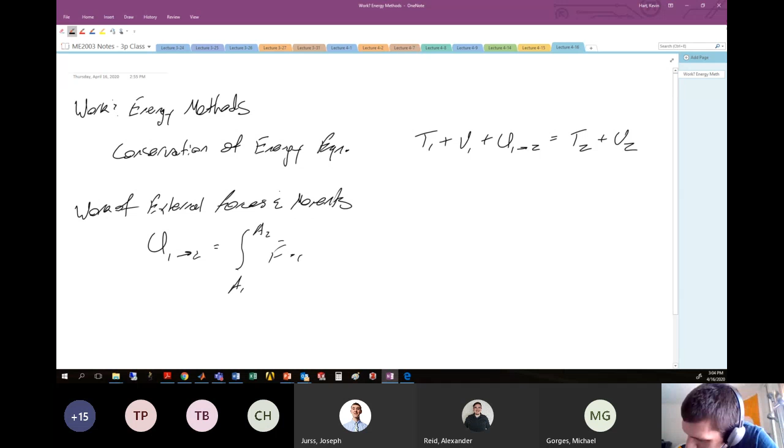So work of external forces and moments was this U1 to 2, which in big boy form was moving from position A1 to A2 of the forces dotted into the path that they move, plus work associated with moments as they act on our angular motion from angular position A1 to A2 of m dot d theta. With our example problem a little bit later, we'll see how this equation actually applies.

So that was the big boy form. We had a simplified form for when we wanted to look at 2-dimensional Cartesian dynamics, which is mostly like what we're doing in this particular class. So that was your U1 to 2, and this was sort of like the 3-dimensional form.

We also looked at kinetic energy, which was this T variable, and said that the kinetic energy of a rigid body was equal to 1/2 the mass of the rigid body multiplied by the velocity of the center of gravity of that rigid body squared, plus the kinetic energy associated with angular motion, which is 1/2 Ig - the mass moment of inertia of an object about its center of gravity - multiplied by the angular velocity of that object squared. So this was your dollar store version that we're going to use in this class. This is the 2D form.

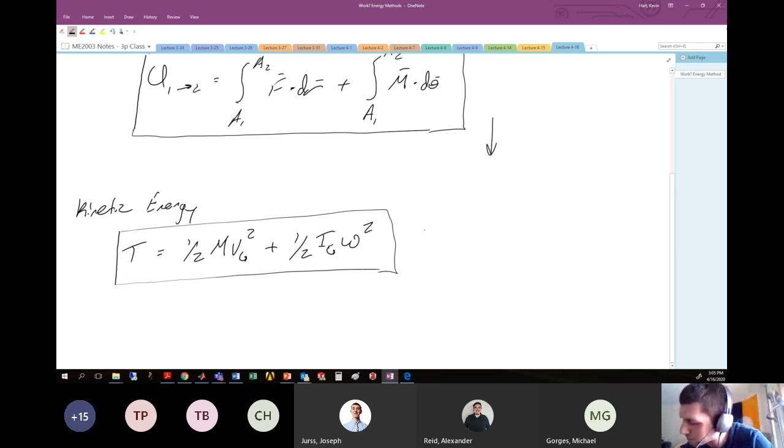And we had the more mathematical form, which if you're going to use an arbitrary coordinate system, or maybe do some more advanced mathematics later, this larger form uses the dot product: the velocity of the center of gravity of this object dotted with itself, plus one half the mass moment of this object—here this would be a tensor, not going to get into that too much—dotted with omega dotted with omega. So this is your big boy mathy version that we used in our derivation and whittled down into the 2D version.

So this is your 3D version. We're mostly going to stick with this equation here. But the point is that we had some kinetic energy associated with linear motion—so this is kinetic energy of linear motion—and this guy here is the kinetic energy of angular motion.

So that was your external forces and moments portion of the work and energy equation, and we also had the kinetic energy portion, which we've been whittling down over the last day and a half. Now we move on to what is the easiest component, and it should maybe only take us about 10 or so minutes to get through: the potential energy term. So this is the last term, and that is the potential energy term.

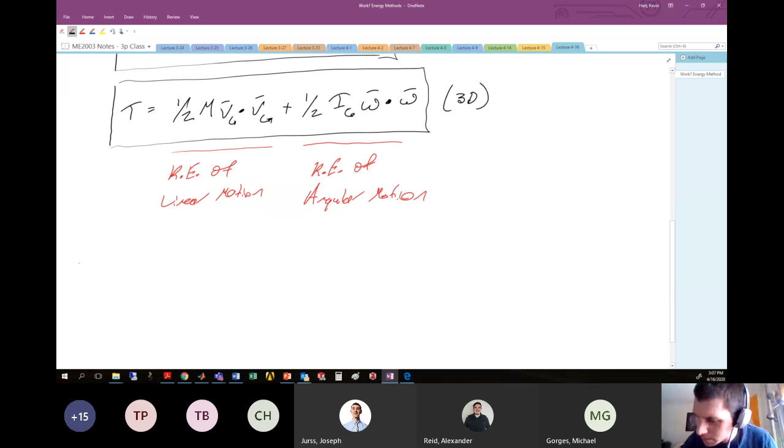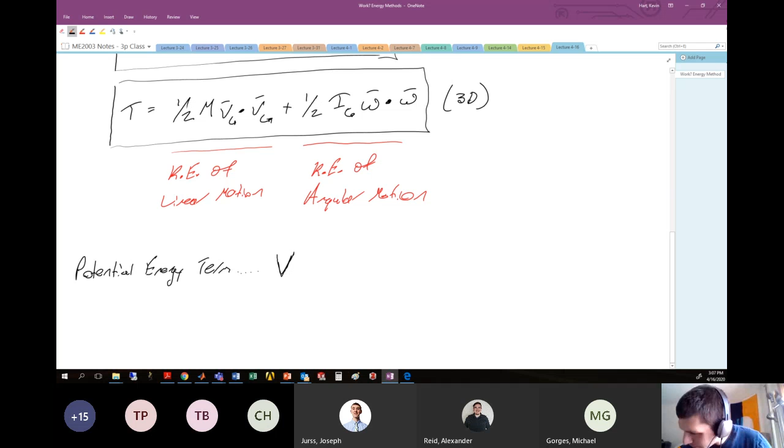Usually given with the capital letter V. And that can be a little bit complicated because we use V for velocity and V for potential energy. So I'll try to be very clear as I'm moving through what variable I'm talking about. So here, this is the potential energy term, this capital V.

Now, potential energy has a variety of forms, and it can come from a variety of places—so it can come from many sources.

The sources that you probably saw in your particle dynamics class were potential energy that might come from gravity. So this would be gravitational potential energy, usually given by something like capital V with a lowercase g, so V sub g.

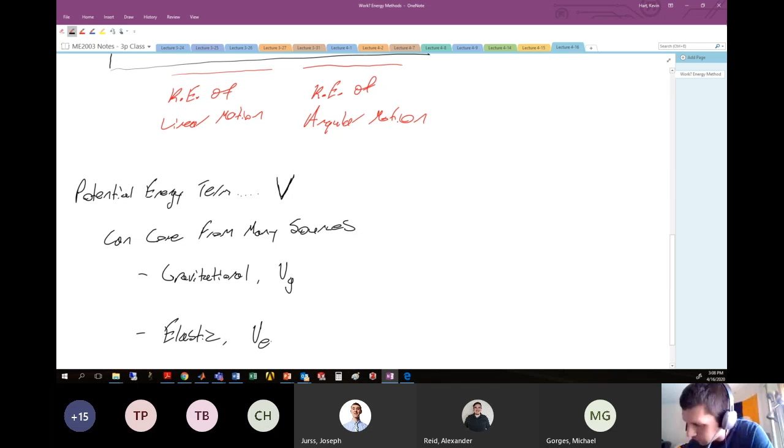You may have elastic potential energy, usually given by the variable capital V lowercase e. And these are the two that you're probably most familiar with from your particle class. So you talk about elastic potential energy of a spring, for instance, and gravitational potential energy being something like the weight of the object multiplied by the height of the object above some datum, which we'll talk about a bit more.

But it can also come from other sources. So some other sources that are a little bit more hidden that you might not see all the time are like electric potential energy. So if you've got a voltage difference between two different locations and some charged rigid body or some charged particle, it's going to be drawn one direction or another, and this potential we call electrical potential energy.

And hopefully you've talked about electrical potential energy in your physics class. So when you took physics 2, you talked about electrical potential energy. No variable here, because we're not really going to talk about it in this class.

But another source of potential energy that you might also have is chemical potential energy. So think about your car—you've got gallons of gasoline in your car that could potentially turn into kinetic energy. So we're feeding this liquid gasoline chemical into our engines, and there's some reaction happening that's turning that into kinetic energy.

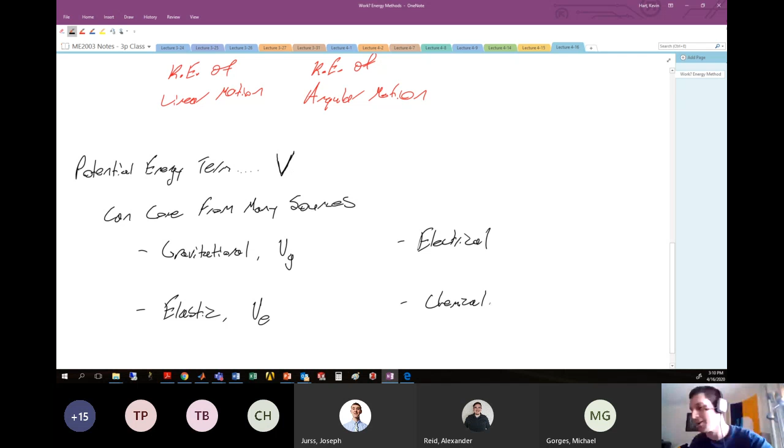Okay, so there is stored potential energy inside the liquid that is gasoline inside your car—so chemical potential energy. Same thing with a bomb: there's chemicals in there that can explode and turn into kinetic energy. So there are a lot of different types of chemical potential energy. But just like in your particle class, we're really only going to talk about the first two here: the gravitational potential energy with the variable Vg, and the elastic potential energy with the variable V sub e.

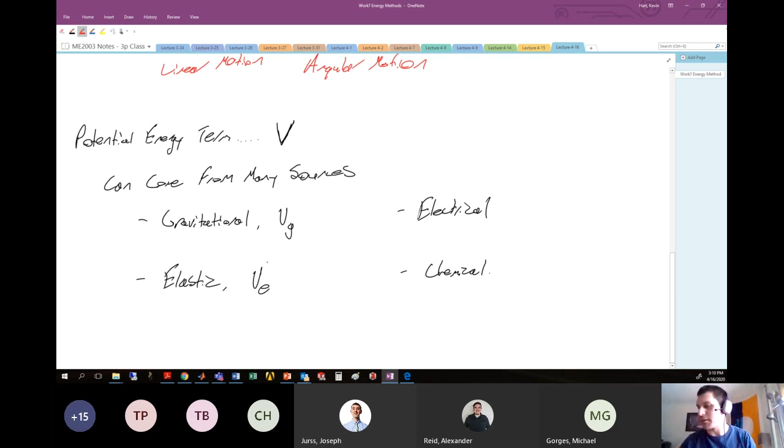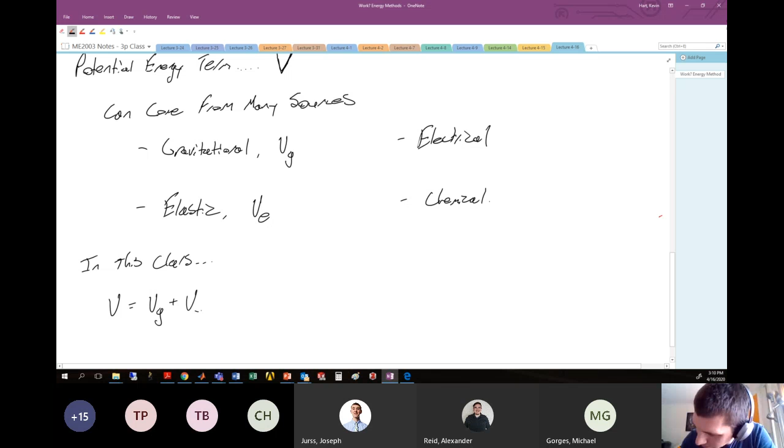So this is mostly what we're going to talk about in this particular class, though I just want you to be aware that there are some other possible sources of energy out in the world, including electrical, chemical, and others. So in this class, our potential energy just boils down to potential energy from gravity plus potential energy from some sort of elasticity. Let's talk about each one of these terms quickly, and we'll be on with it. First, let's talk about the elastic potential energy, which is VE.

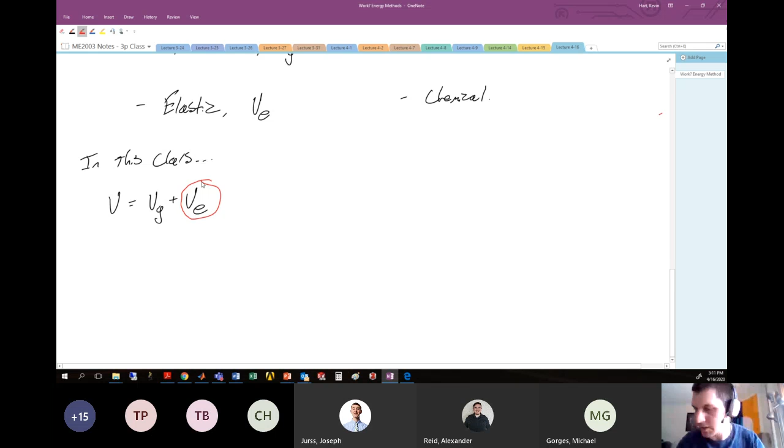All right, elastic potential energy. If you've taken ME2004, or are currently taking it, or you've taken ME3005, the mechanics of materials sequence, then you know that objects able to be deformed by forces will store some amount of elastic energy. In this particular class, we're assuming that all of the bodies we have are rigid, meaning I can apply forces to our object and it won't deform in any way. Now, realistically speaking, that's not true, but that's sort of the assumption we make in this class.

So I'll just say here that in this class, our bodies are rigid.

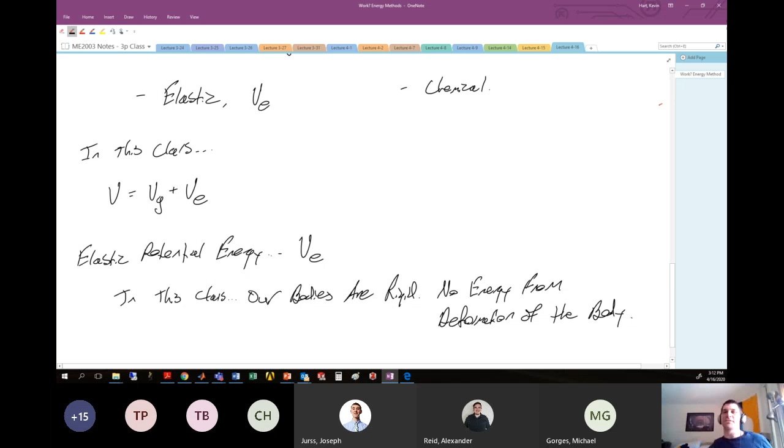So no energy from deformation of the body. That's because all the bodies we talk about in this class, we're going to be assuming rigid behavior. So a lot of times when you hear things like elastic potential energy, people are talking about energy associated with putting load on a structure, and it's in this compressed state that wants to expand and release its energy. We're not talking about that kind of elastic potential energy in this class. What we're talking about is the elastic potential energy associated with springs. In this class, we only talk about springs.

I will tell you that the elastic potential energy associated with a particle displacing a spring, or a rigid body displacing a spring, is exactly the same. So pictorially, you might think about this for a particle. You might have a particle here of mass m connected to a spring, which is hooked into some wall, let's say. And it has some original length, L naught.

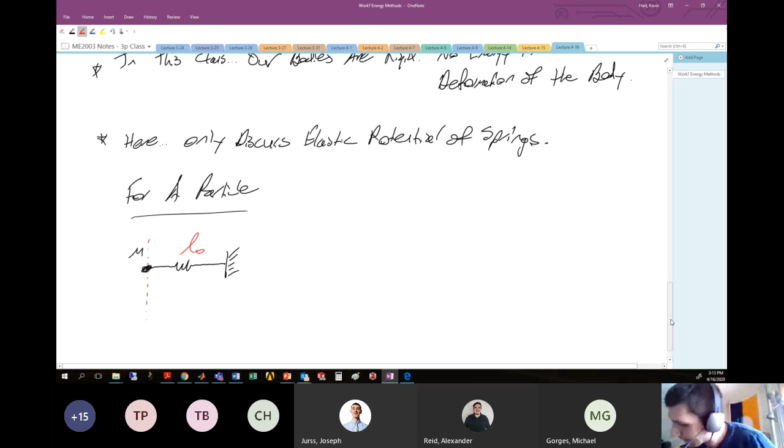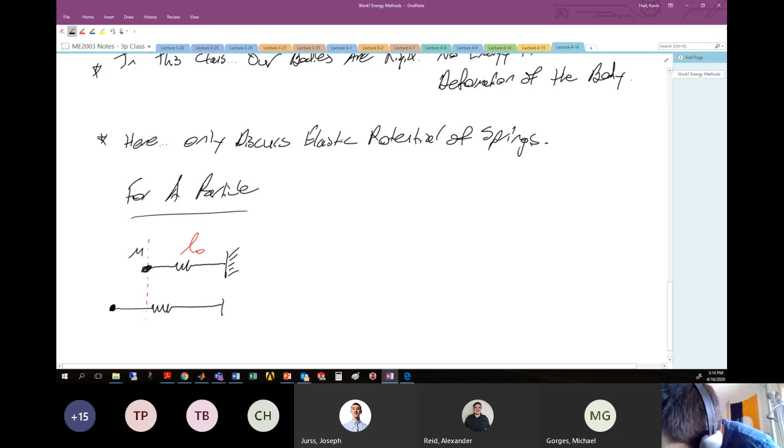Sometime later, let's say we pull this mass out some distance so that the spring is extended to some final position, which is LF, the final position. And that means we have pulled this mass out what we would call some distance x.

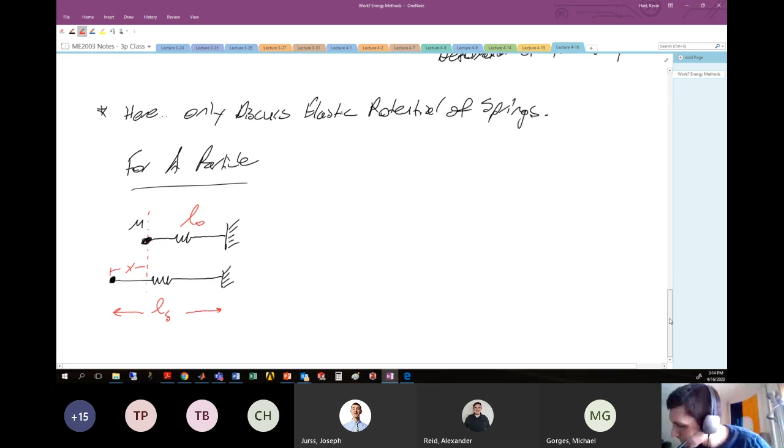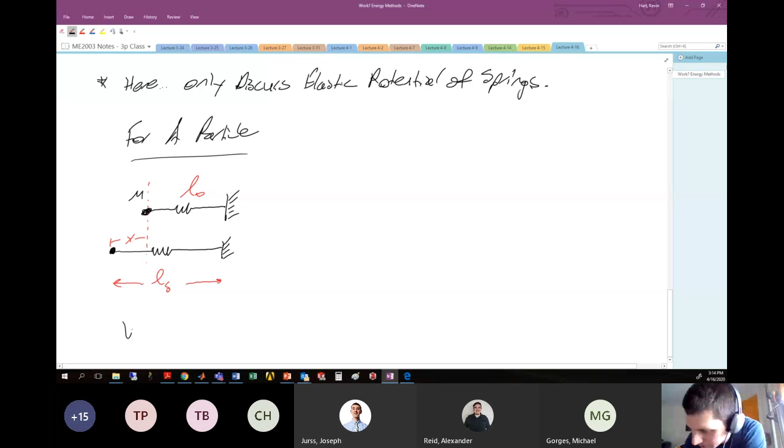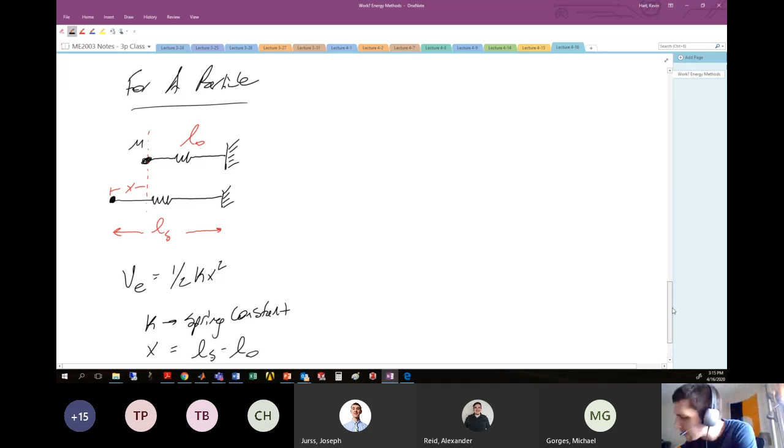In your particle dynamics class, you should have learned that the energy associated with this particular motion, or the potential energy that the spring has when it's displaced away from its original location x, is Ve equals 1/2 kx squared, where k is the spring constant and x is equal to the total displacement of the spring from its original position. So that is LF minus L0. So that is your elastic potential energy of a spring.

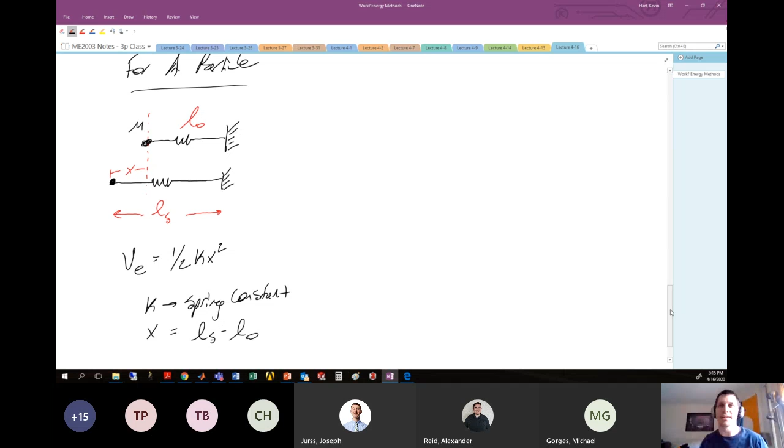Now, whether that spring has extended because of particle motion or because of rigid body motion is irrelevant. The energy stored in that spring is the same regardless of what it's connected to. So we can draw the same exact picture, but now for a rigid body. It will look more or less exactly the same.

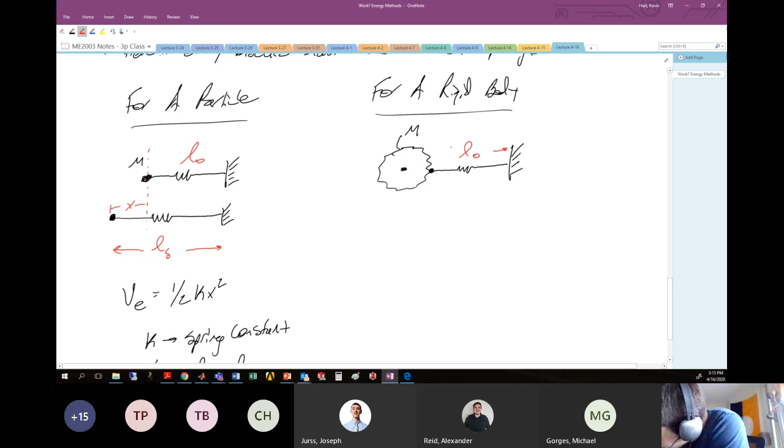Here's your mechanics potato. It's got mass, whatever you want it to be, it doesn't make any difference, we'll call it mass capital M. And let's say this guy is attached to some spring here with some original length L0, and we'll assume unstretched in this condition.

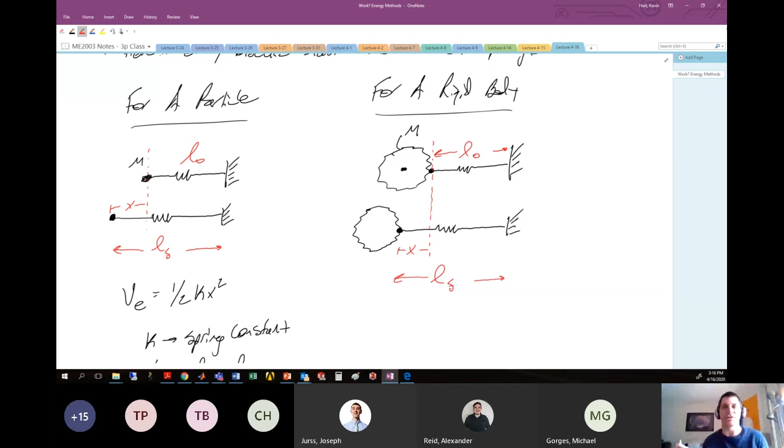Our rigid body then sometime later gets displaced out to here. It's still connected in that same general location. It's now moved out to another position, which is LF here, and it's moved out away from its original location X. It's the same exact situation, except it's attached to a rigid body instead of a particle. So it has zero bearing on how much energy is associated with that spring based on what it's attached to.

So we have the exact same general equation, same result, that the elastic potential energy here is still 1/2 kx squared. Same exact thing. So whether it's attached to a particle or a rigid body, irrelevant. The energy associated with that displacement of that spring is 1/2 kx squared. So that's the elastic potential energy. That bit's pretty easy. Also easy is gravitational potential energy.

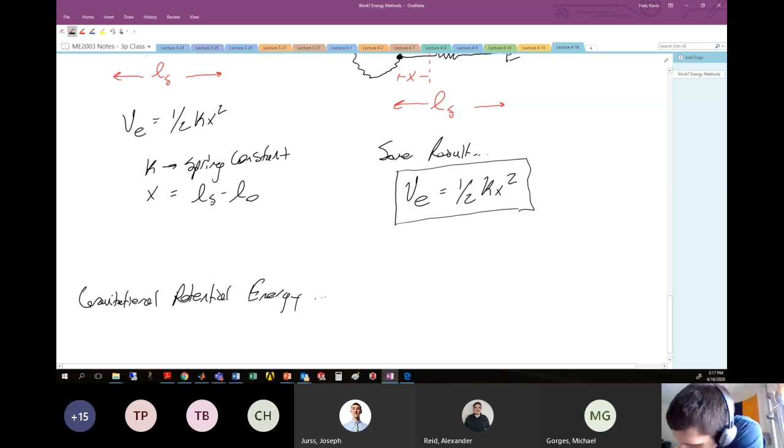Which is given by V sub G. Again, this requires a series of pictures. If I've got a particle that's up here, it wants to move downward. It has the potential to turn into kinetic energy as it's standing up here. If I were to release it, it would fall onto the table because that would be a lower energy configuration for that particle, since it's closer to the center of mass of the Earth.

So generally, we say that the potential energy an object has requires us to define some location where that gravitational potential energy is 0. This requires a datum where Vg is 0. Because gravitational potential energy can exist basically at any location, we have to define some arbitrary reference point where that energy associated with that potential is 0. We typically do this by saying that some particle of mass m exists in some location here, and there exists some horizontal plane that is a datum.

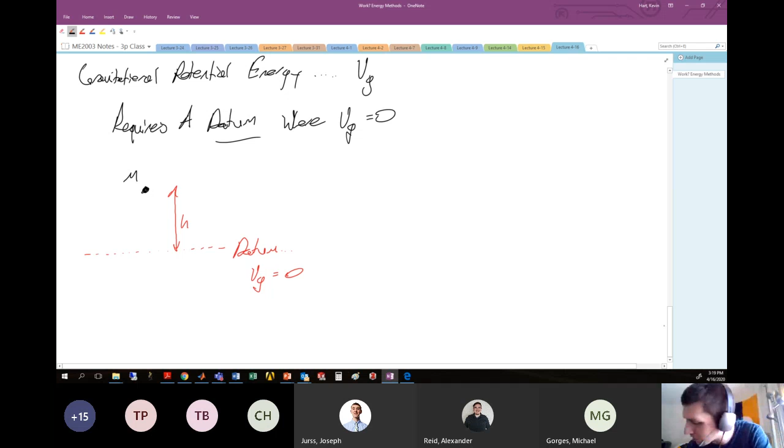For which the gravitational potential energy is equal to 0. If that is the case, then the energy associated with the particle in this current configuration, which is at a height above that datum of h, you should have learned in your particle dynamics class, is Vg equals the mass of this object times the acceleration due to gravity, g, multiplied by the height that object is above that particular datum. So this is the particle dynamics version of the gravitational potential energy. It is more or less the same for a rigid body. So this is a particle.

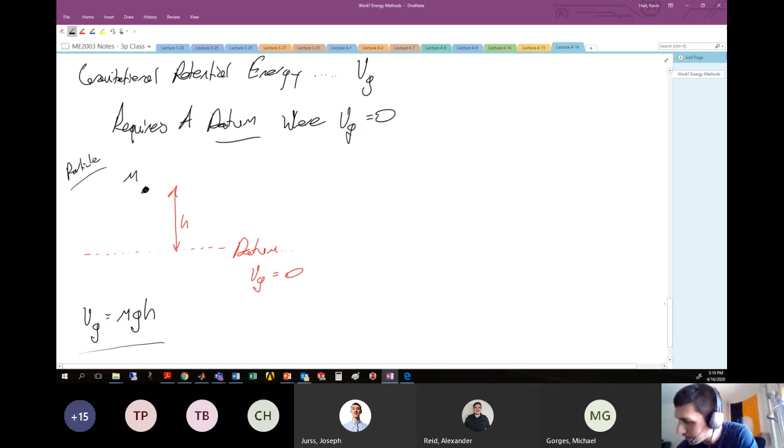And we have basically the same thing for a rigid body. If your rigid body is like a potato, and it's got some center of gravity g, and this entire thing has a mass of capital M, then the potential energy of this entire body on average is the potential energy associated with all of the mass of that rigid body contained at the center of gravity at a height h above the datum.

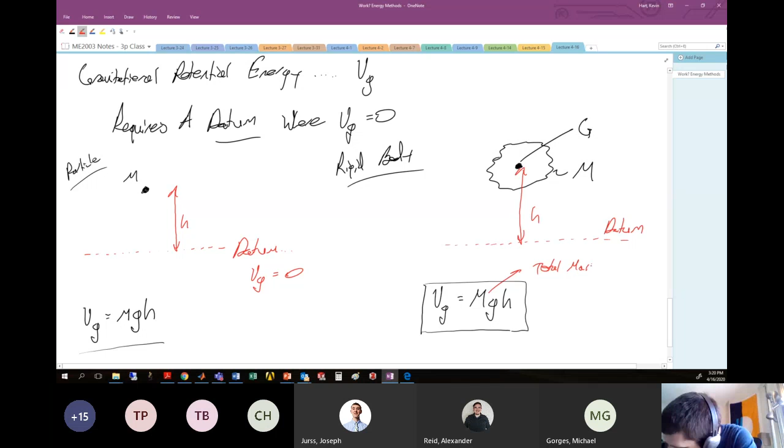So if we again have another datum here, and the center of gravity is at position h, then the gravitational potential energy of this rigid body is capital M, which is the total mass of the rigid body, multiplied by the constant of gravity, multiplied by the height that this object is above that particular datum. Another very simplistic definition, where capital M is total mass of the rigid body.

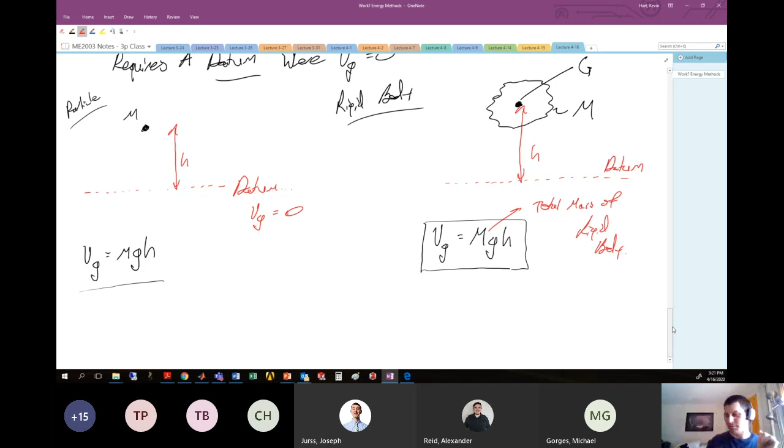Saving the most simplistic terms, which are these potential energy terms, for the very end. We did a whole rigmarole for kinetic energy, that was kind of complicated. Here, the potential energy is much more simplistic. All right, so all together...

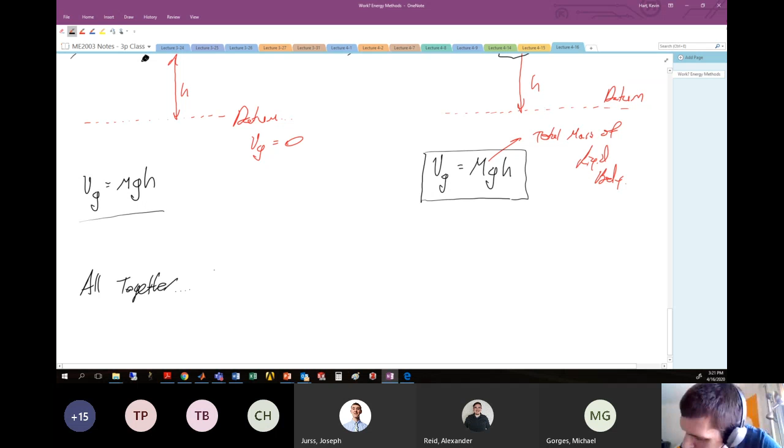Our conservation of energy. Remember our equation, which you will probably be sick of: T1 plus V1 plus U1 to 2 is T2 plus V2.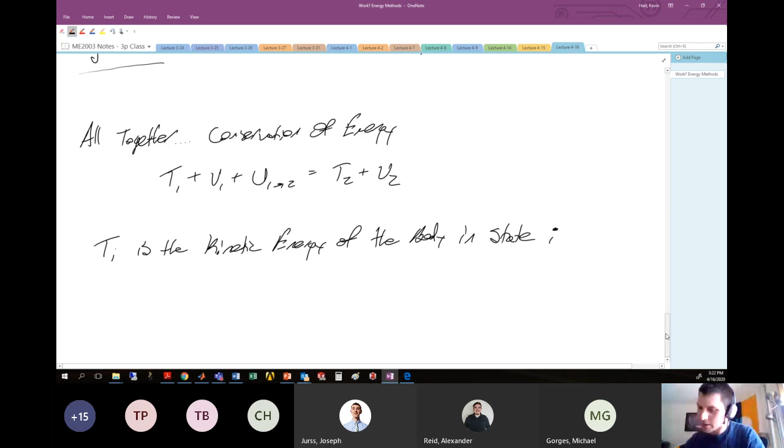We would say here that each one of these terms is the following. T obviously is kinetic energy. So, Ti is the kinetic energy of the body in state I - whatever that state happens to be, whether it's Wyoming or Georgia or Massachusetts. Given by the equation, Ti is 1/2 m times the velocity of the center of gravity in state I squared, plus 1/2 mass moment of inertia of the body about the center of gravity multiplied by the angular velocity of that object in state I squared.

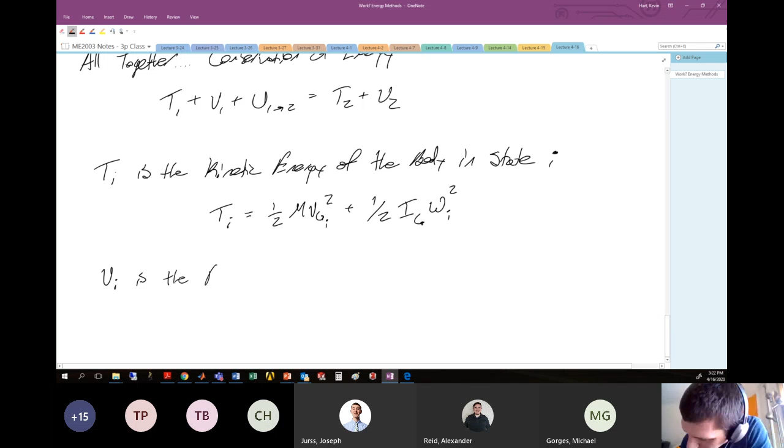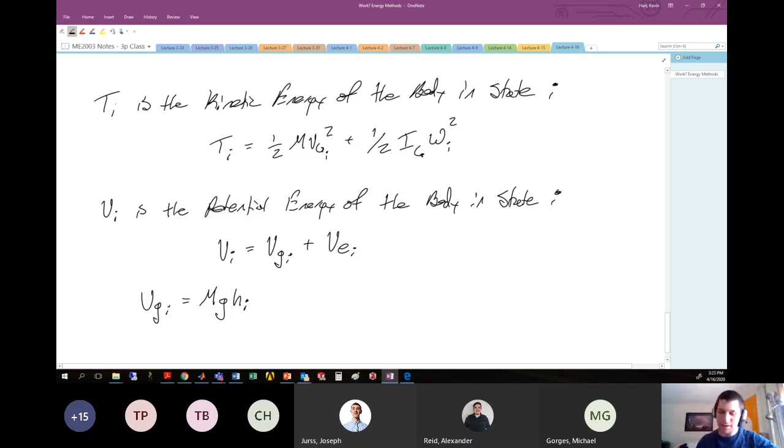Vi is the potential energy of the body in state I, and it is given generally by Vi equals the gravitational potential energy of this object in state I plus the elastic potential energy of this object in state I, given by VGi and VEi, where VGi is the mass of the rigid body multiplied by the constant of gravity times the height of the rigid body in state I away from the datum - specifically for the center of mass, the height of the center of mass of the object. And the elastic potential energy of this object in state I is 1/2 k, the spring constant, times xi squared, where xi is the final length of the spring minus the original or unstretched length of the spring.

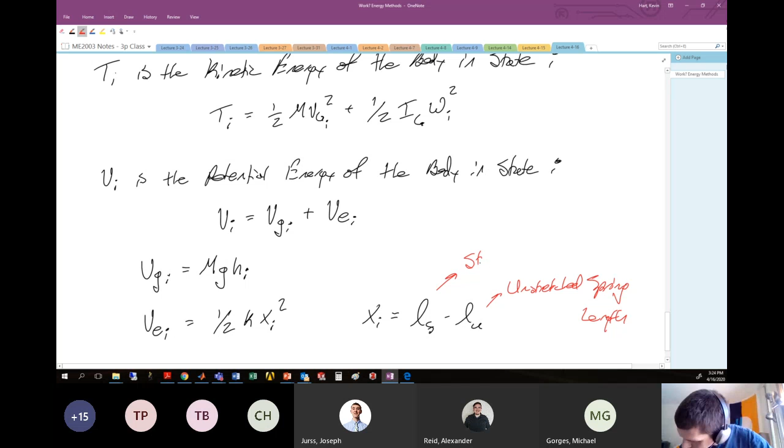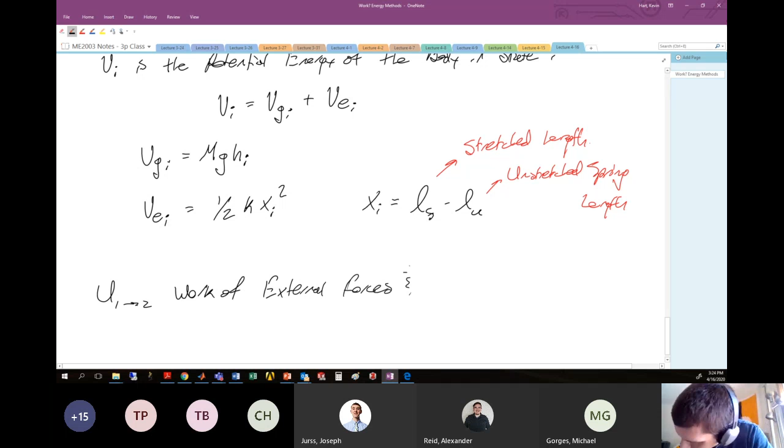And lastly is our term associated with external forces and moments, and that is U1 to 2, work of external forces and moments, which was given by the equation U1 to 2 is the integral from A1 to A2 of F dot dr, plus the integral from A1 to A2 of the moments dotted into the path of angular motion.

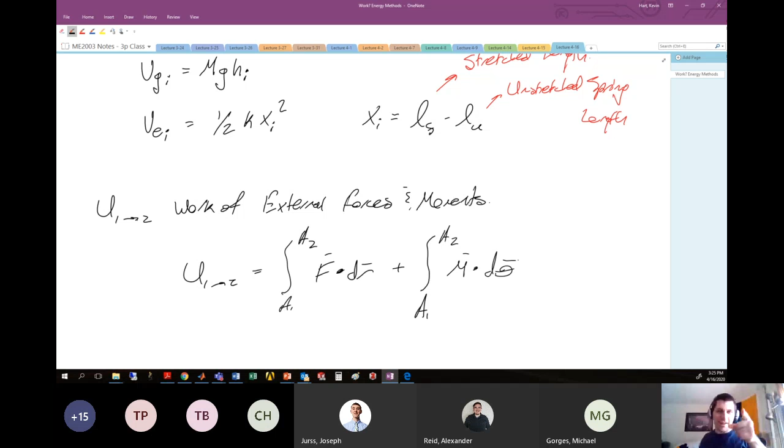All right, we got it all. We got it all. We're A+ material. We got it all. We got kinetic energy, we got potential energy - oh, what potential we have. Okay.

So that's that. That's kind of closing out the lecture notes for work and energy. On to an example.

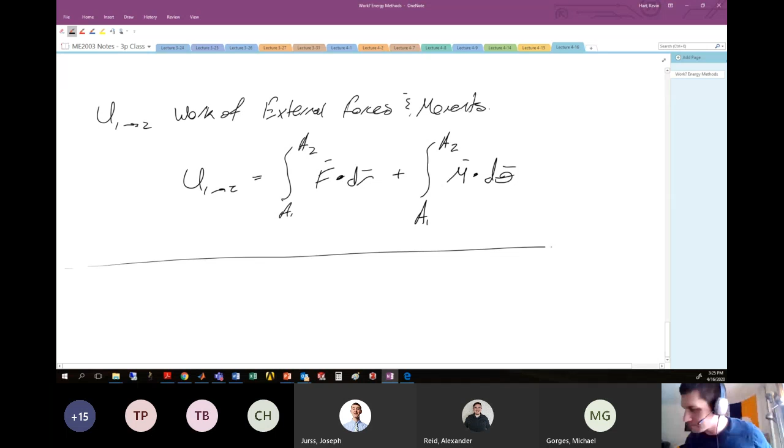Let me pivot you guys over to the PowerPoint slides now so that we can copy an example down, and we'll work our way through it.

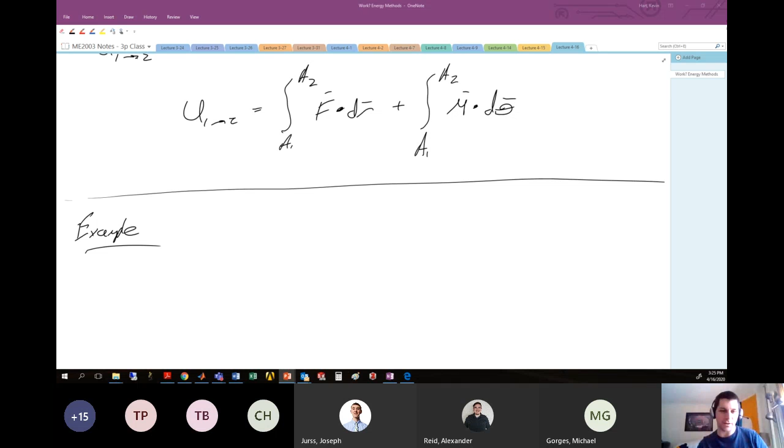All right, this example is complicated, has a lot of stuff, so I'll give you a sec to copy it down. I'll transfer over to my white pad as well and get the relevant information, and we'll make our way through it.

Foot-pound second squared, my favorite unit ever.

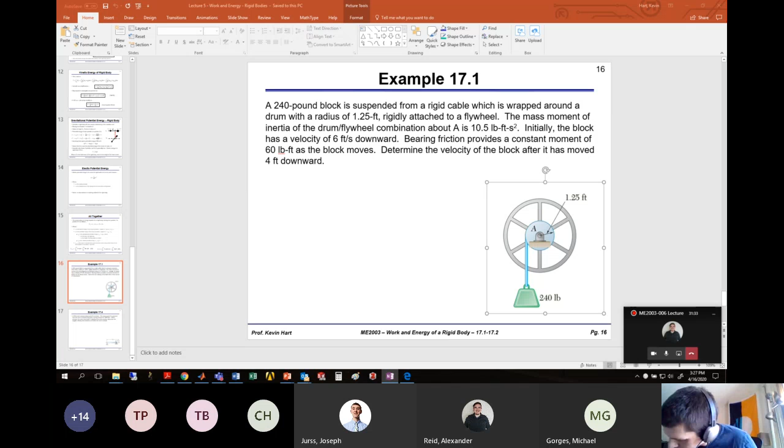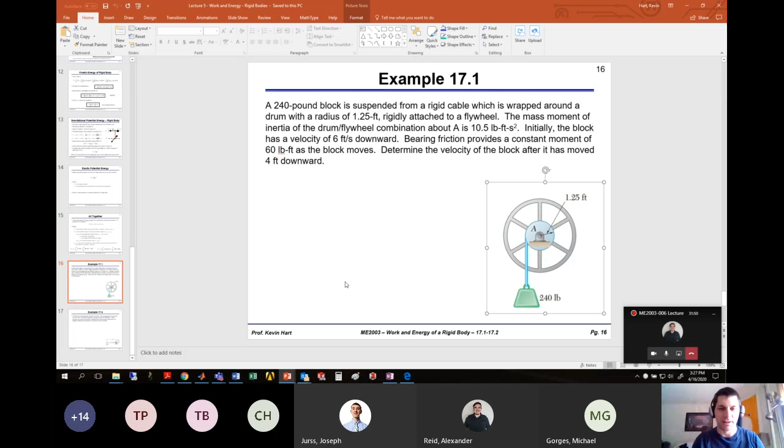Okay, I'll toss you back over to the white pad, and I have all the information down here that you kind of need. So if you're still copying down the problem, you can keep at it with the information I have here on the pad.

All right, so we've got this flywheel and block combination. Here's this flywheel, it's so fly, and here's the block. They're attached together with this rope, making this all one system together. So whatever force is inside of the rope, that's not external to the system, it's internal to everything that's going on. So that's not technically an external force that we have to consider.

We've got the weight of the block, 240 pounds, the velocity of the block in its initial configuration, subscript 1, 6 feet per second downwards. We were given a mass moment of inertia of the flywheel and drum combination, which is, in my favorite English units, 10.5 foot-pounds second squared. The moment that we have from friction, which opposes this motion during the entire time, is 60 foot-pounds. We'll get to that in just a second.

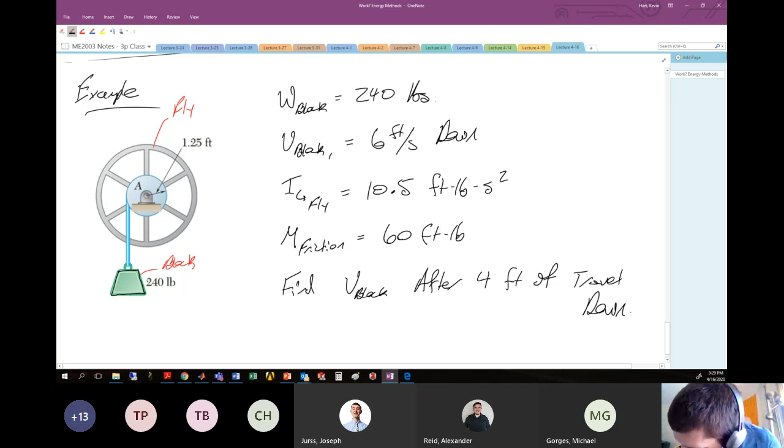We want to find the velocity of the block after 4 feet of travel downwards. So the block is going to move from this location that you see here, down 4 feet, until it gets to another location down here. The center of gravity of this particular block is going to be moving 4 feet. So let's say that this distance here is 4 feet.

This is kind of the important length for us as this block moves from position 1 to position 2. So attacking this problem, we're going to use our conservation of energy equation: T1 plus V1 plus U1 to 2 equals T2 plus V2. This is kind of how all of these particular problems are going to start, with this general overarching equation. Once you get that on paper, then it's up to you to start whittling those terms down with information that you have.

So this is our general overarching equation. And once we identified that this is the problem that we have, we need to identify what is state number 1 and state number 2. State number 1, this is when the block is in its higher configuration. I'll just say initial position, and I'll say the block is in its initial position.

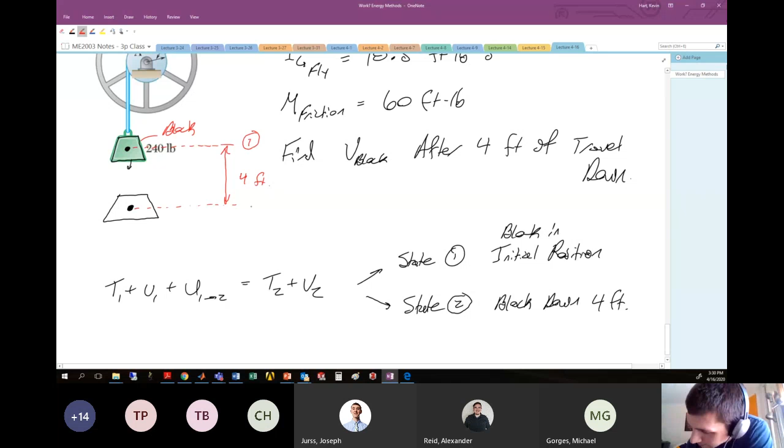And state number 2, it'll be block down 4 feet. So those are my two different states. If I want to label them here on the figure, state number 1 is here, and state number 2 is here. So there are two different configurations for this particular problem.

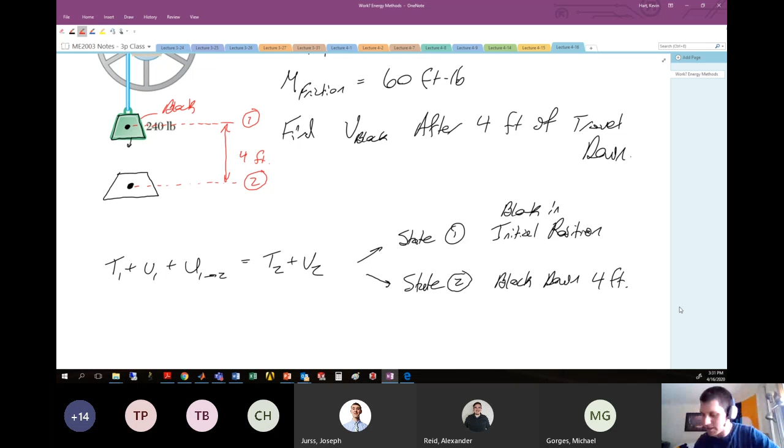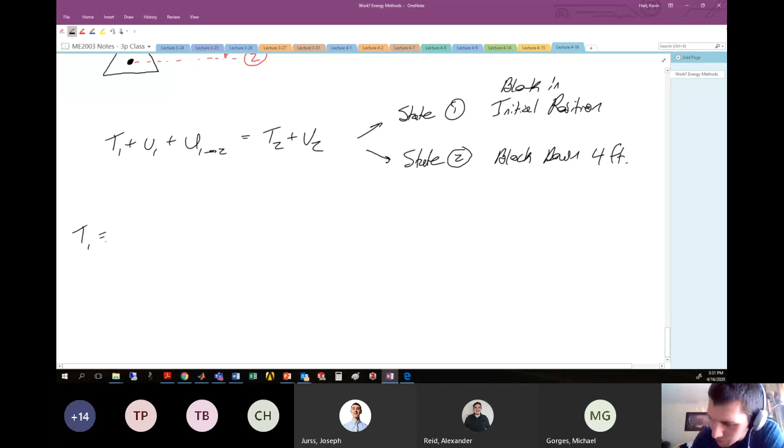All right, so let's start whittling away at some of these terms. First, kinetic energy in position number 1. Since we have two different objects in this system, we're going to have to consider the kinetic energy associated with both of those objects. They're connected through this rope, so we sort of think of it as one whole system, but we can look at each of the individual components separately. So we're going to have some kinetic energy of the block plus some kinetic energy of the flywheel.

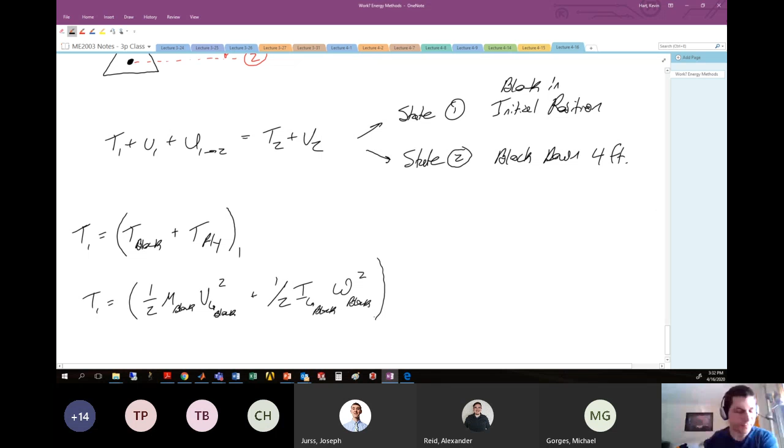I'll just write T fly, because I'm just fly like that. This is all in configuration number 1. Each one of these two individual pieces has its own kinetic energy. So we might have something like 1/2 mass of the block and velocity of the center of gravity of the block squared, plus 1/2 Ig of the block multiplied by the angular velocity of the block squared. This is our general equation for the kinetic energy of a rigid body, some associated with linear motion, some associated with angular motion. We can also have a similar looking setup for the flywheel.

Each one of these individual components could have both angular kinetic energy and linear kinetic energy. However, we can see from our problem that the block is only moving in this linear sense. The block itself is not rotating in any way. We're not told that it's wound up on the string and then unwinding on the string or something, so we're going to assume that this block has no angular velocity. So this particular portion of the kinetic energy in the block is 0. There's no angular motion of the block, it's only moving up and down.

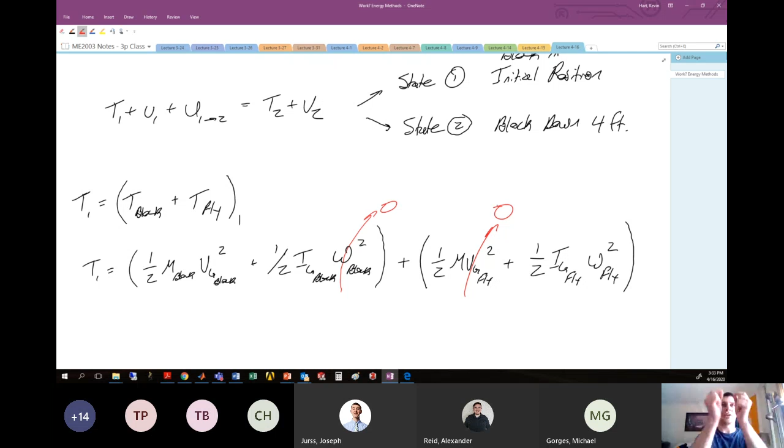In a similar way, in position number 1, there is no linear motion of the flywheel. If we go back up to our position here, this flywheel isn't moving in any direction, the flywheel isn't going anywhere. It's pinned at A and it's fixed. So by that same regard, there's no motion of this flywheel in position number 1 either, so both those terms are going to be 0. The only things we're really going to be left with is energy associated with linear motion of the block and energy associated with angular velocity of the flywheel.

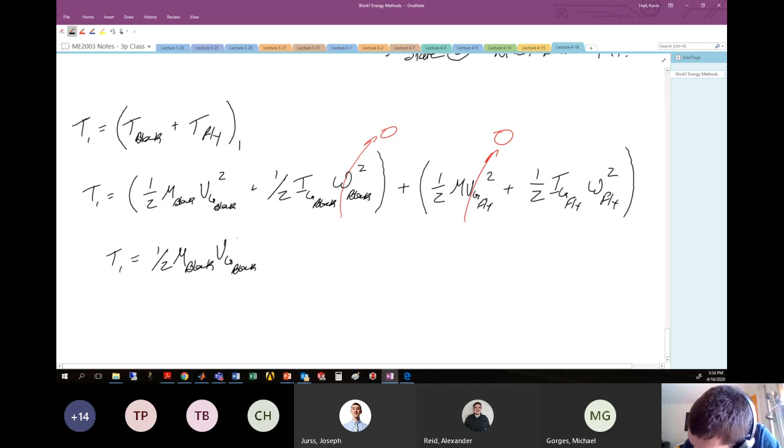So this will be 1/2 mass block times velocity at the center of gravity of the block squared, plus 1/2 Ig of the flywheel times angular velocity of the flywheel squared. And this again is all in configuration number 1, right? So we have information for most of this. Let's get the information down here.

So this will be 1/2 mass of the block. We're given the weight of the block, so we can normalize the weight by gravity to get the mass. We're told that this is 240 pounds, normalized by the acceleration of gravity in English units, which is 32.2 feet per second squared. So that is the mass of my block multiplied by the velocity at the center of gravity of my block in condition number 1, which we're told at the beginning of the problem is 6 feet per second downwards. You can write it as positive or negative, doesn't really matter because it's about to get squared anyway.

Now we add to this 1/2 the mass moment of inertia about the center of gravity of the flywheel given in the problem, 10.5 pound-foot-second squared, multiplied by the angular velocity of the flywheel in position number 1. We got a problem now because we don't know what the angular velocity of the flywheel is at this particular time.

However, we can use kinematics to figure out what it is. So I'll say we need kinematics for the angular velocity of the flywheel in condition number 1.

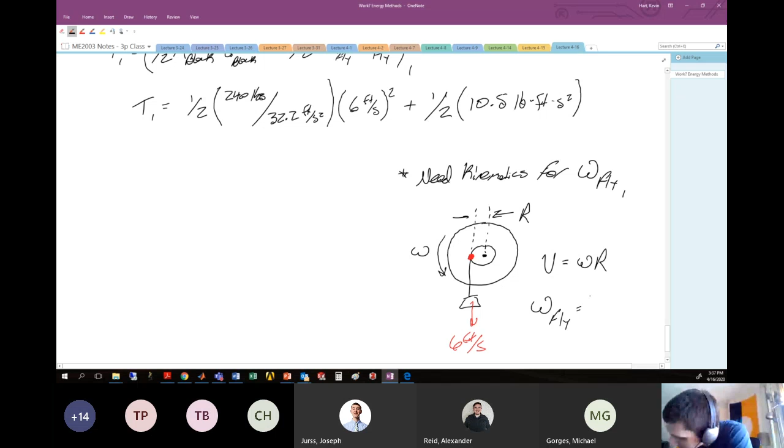So we can solve and figure out that the angular velocity of the flywheel has a general relationship to the block, which is the velocity of the block divided by the radius of the drum, r. This is the kinematic relationship that we need to continue with this particular problem.

And so because of that, my angular velocity of the flywheel can be solved for in terms of the linear velocity of the block. So in this situation, after rearranging and plugging this in for omega, we have the velocity of the block, which we know is 6 feet per second, divided by the radius of the drum, which we were given up here in part of the problem as 1.25 feet. And don't forget, this guy gets squared.

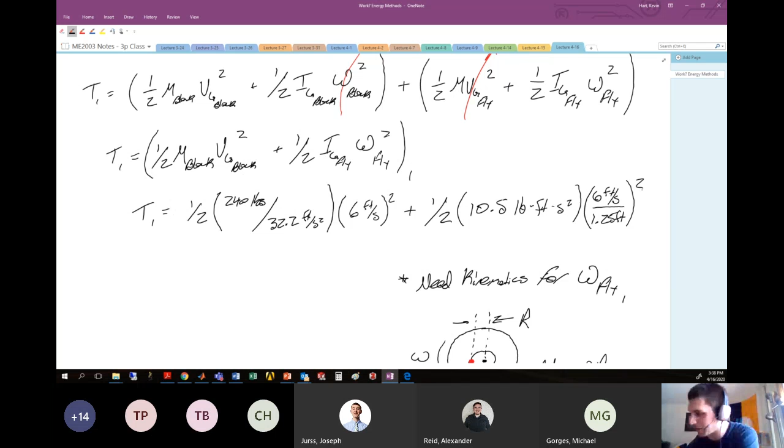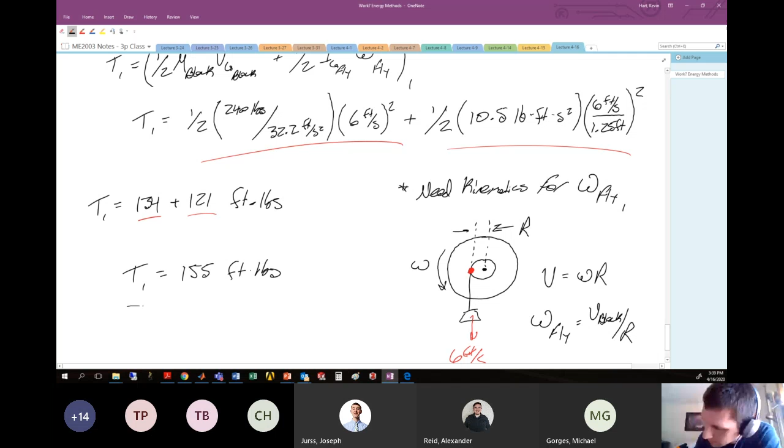So we needed that kinematic relationship between angular velocity and linear velocity to proceed. All values in this particular expression are known, and you can solve straight away to get something like the kinetic energy of the flywheel-block combination in position number 1 is 134 plus 121 foot-pounds. This 134 coming from the block motion and 121 coming from the angular motion of the flywheel. So they both have pretty equivalent contributions. In the end, the total kinetic energy in position number 1 is 155 foot-pounds. So we're done with our first term.

Oh man, I'm old. I'm tired.

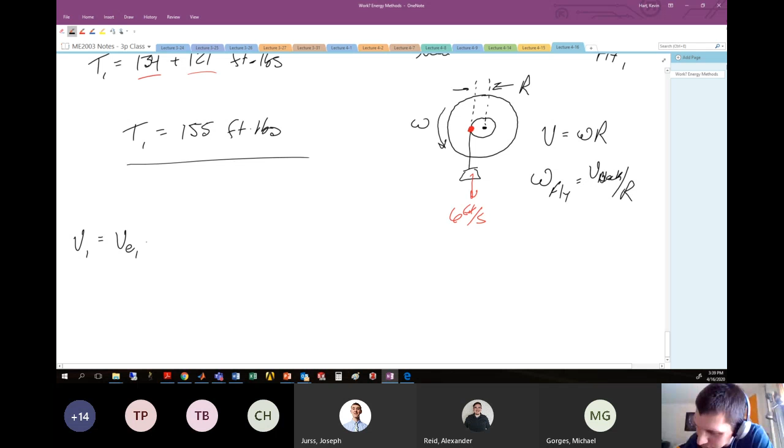All right, so that's your kinetic energy in position number 1. Next, we got to talk about the potential energy in position number 1. We don't have any springs in here, so if we wrote out our elastic energy in position 1 plus gravitational potential energy in position number 1, well, I don't see any springs in this thing. So there's no springs acting on this guy, meaning we don't have any elastic potential energy in any configuration. So that goes to 0. Now, for gravitational potential energy, we're going to have to define a datum at which our gravitational potential energy is 0. So here I'll say we need a datum.

To define our gravitational potential energy, you typically want to define a datum at the lowest position of interest in your system. That's because we typically want to define positive values for potential energy. So if you set your datum at the lowest point having zero potential energy, then all of your potential energy values are going to end up being positive, which makes calculation a little easier.

For this particular problem, since my block is at its lowest point in configuration number 2, I'll set my datum here, where the gravitational potential energy is equal to 0. So when the block is in position number 2, it will have 0 gravitational potential energy.

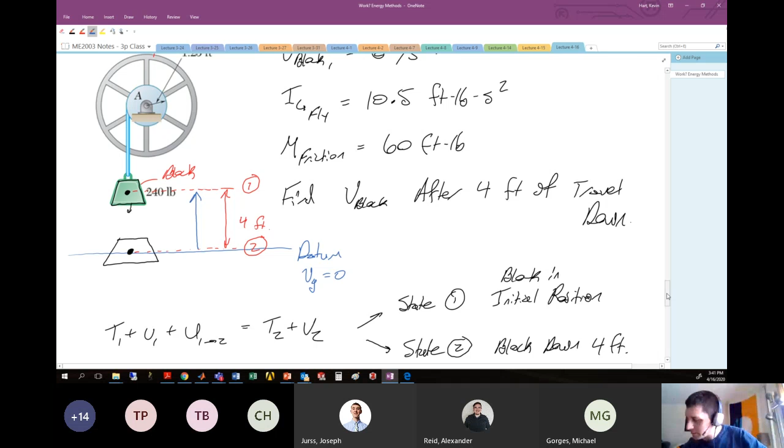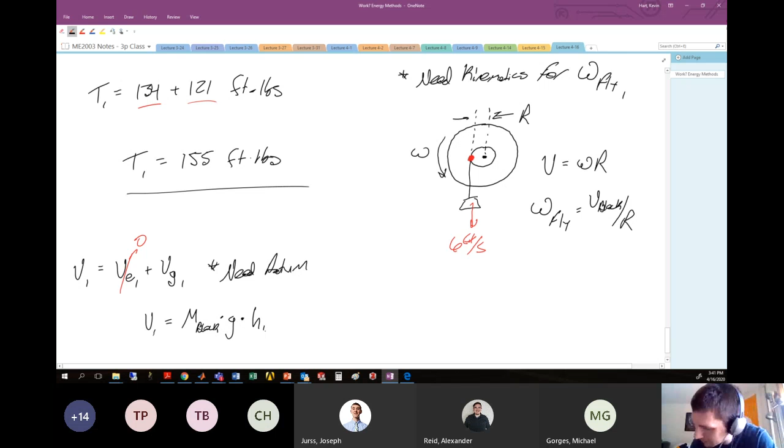But in position number 1, the block is at some height above where it will be, which is 4 feet away from the datum. So if I set my datum as the bottom location, the potential energy in position number 1 is the mass of the block times the acceleration due to gravity multiplied by the height above the datum in position 1. This term is just the weight of the block, mg, so it ends up being W times H1, specifically for the block.

So the potential energy in condition number 1 is the weight of the block, 240 pounds, multiplied by the height above the datum at which the block lies, which for us is 4 feet. Working this out, the potential energy in position number 1 is 960 foot-pounds.

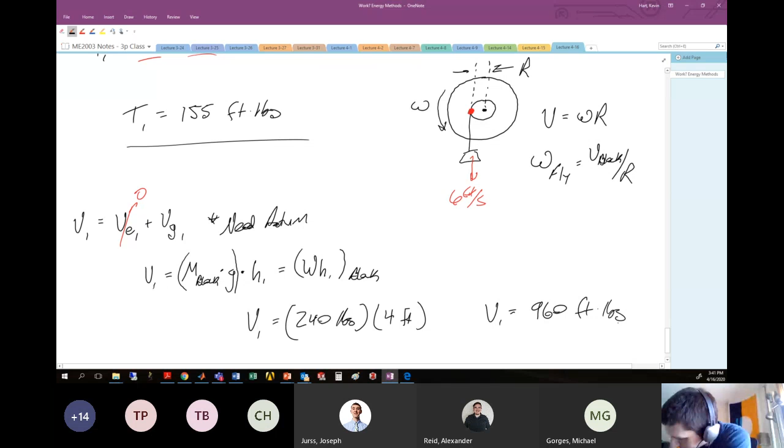How are we doing out there? Any questions? Ooh, I think I do have a question. What's my favorite scary movie? No, that's not the question.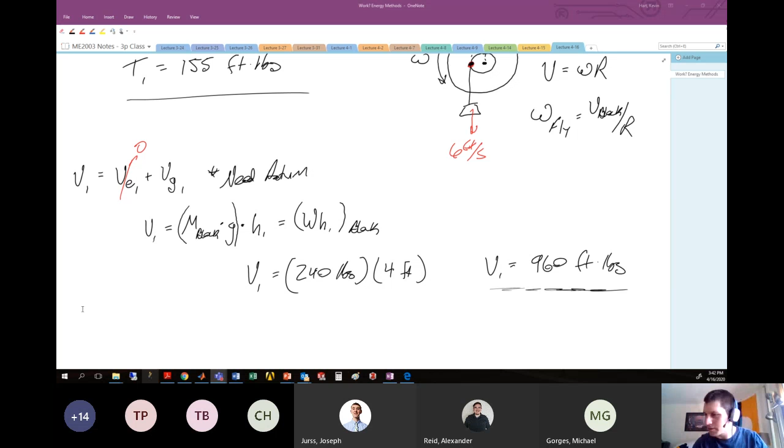255 foot-pounds. Oh yeah, so I wrote 155. I'm sorry, thank you, this isn't 155. Boy, math is hard. 255. Thank you, Hannah, good catch. 134 plus 121, oof, tough. 255. Apologies. All right, continue.

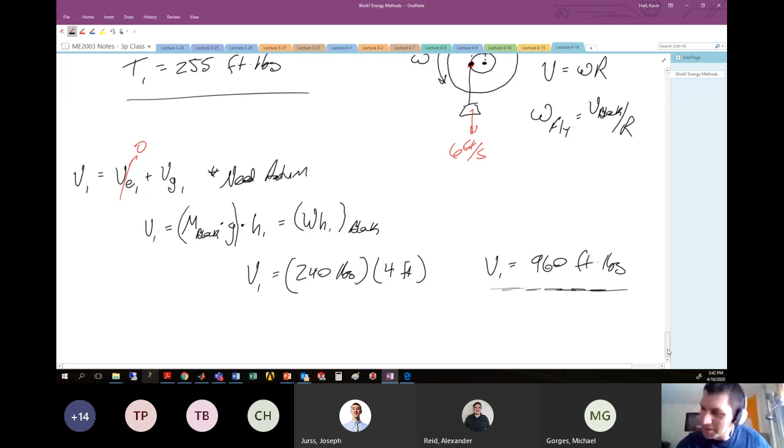Now we have to get to a little bit of a complicated term, and that's the work associated as we move from position number 1 to position 2. So here we have U1 to 2.

Our most general equation is going to be something like the integral from A1 to A2 of F dot dr, plus the integral from angular position 1 to angular position 2 of M dot d theta. We don't have any external forces acting to impede our motion or in the direction of our motion in this problem, so this first term goes to 0.

Unfortunately, I do have some external moments acting on the system coming from friction. So here I'll say we do have external moments from friction. Well, that's annoying, but we can deal.

We're told at the beginning of this problem that there's friction opposing the motion, and it's a constant value of 60 foot-pounds. So this wheel is trying to move in this direction—my angular velocity is in this general direction. So the motion of that flywheel is going to be counterclockwise, the general positive sense.

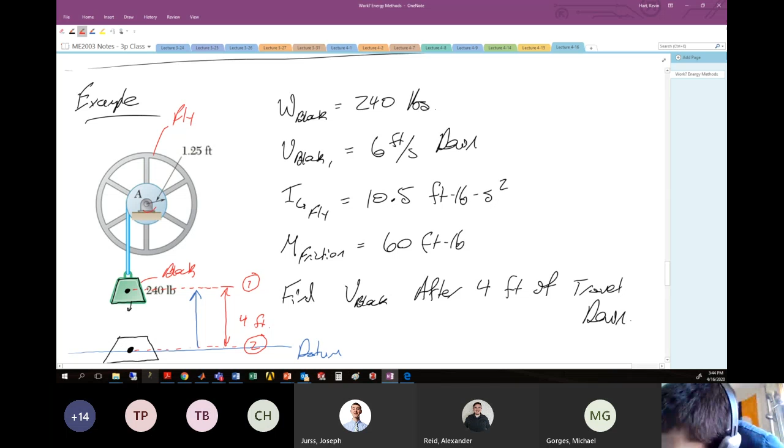And if I have friction acting to oppose that, that friction happens right at this pin at A. If my motion generally is in this direction, then the moment acts to oppose that motion in the opposite direction. So the moment will act to oppose that general motion in this direction—this is the moment coming from friction.

So in simplified form, U1 to 2 equals the integral from angular position theta 1 to theta 2 of the moment acting, which is 60 foot-pounds, d theta. Because the friction is opposing the motion, it's in the opposite direction of the angular path I'm traveling, so that frictional moment is going to be negative in direction.

That's because my path is one way and the moment acts to oppose that direction. So if I dotted the vector of the moment with the path direction, that would be a negative dot product. So, 60 foot-pounds d theta. But I've got another problem—I don't know theta. What is theta 1? What is theta 2? I don't know.

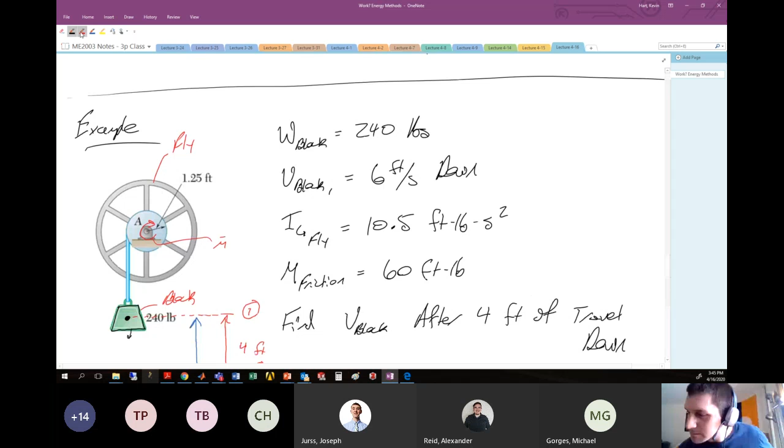As this flywheel moves, it's going to move from some original position - let's call it theta 1 - and rotate around to some other position, theta 2, which I don't necessarily know. I need to know that angular displacement so I can include it as the bounds for this integral. So how am I going to figure that out?

Fortunately, I know how far down this block has to travel - 4 feet for this particular problem. I can relate the length of rope, 4 feet, required for that block to move, to the amount of winding required on the outside of this drum in an angular fashion. As my block moves down, it forces the drum to unwind in a manner equivalent to the amount of rope required to move the block down.

That general relationship is between the arc length and the linear length of a circle. If the linear length here is some amount ds, then the relationship between the arc length traveled and the angular path is given by the general equation ds equals r d theta. This is the general arc length of a circle for the angular displacement you traverse - a relationship between angular displacement and linear displacement.

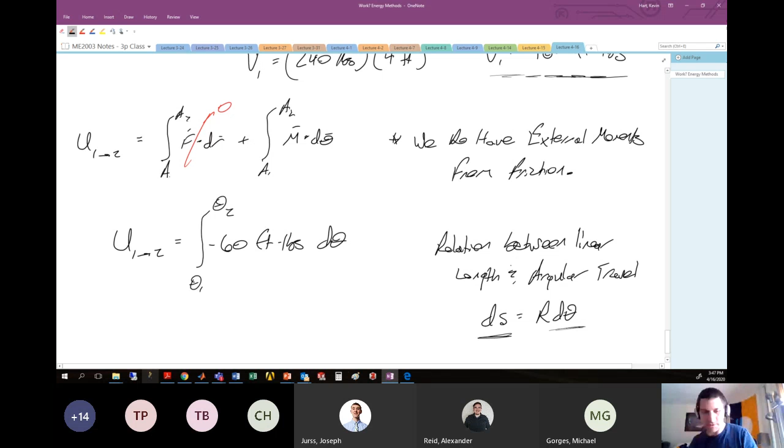In this particular example, we know ds is 4 feet, and we know the radius of the drum where we're unwinding this arc length from is 1.25 feet. So my total angular displacement moving from position 1 to position 2, d theta, which is theta 2 minus theta 1, is just 4 divided by 1.25, which is 3.2 radians. Hopefully we all followed that general idea.

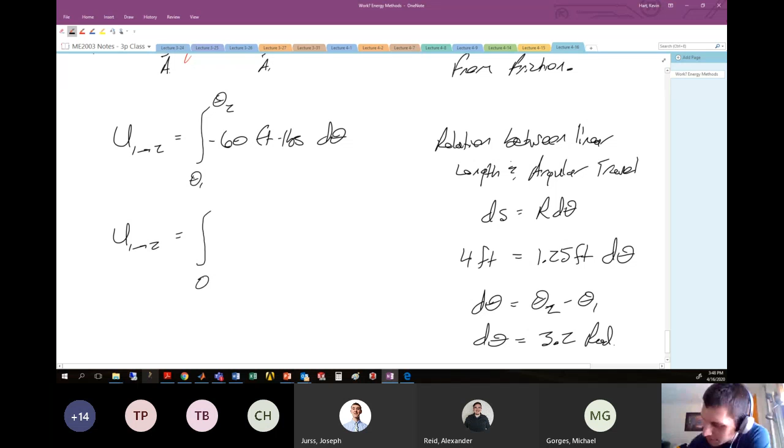Now I'm ready to punch that into my integral. I'm going from some theta 1 to theta 2. I can set theta 1 to be any arbitrary position as long as theta 2 is 3.2 radians beyond that. My moment is constant over that entire path at 60 foot-pounds, integrating over d theta.

After integrating here, 60 times 3.2, retaining the negative sign, gives negative 192 foot-pounds.

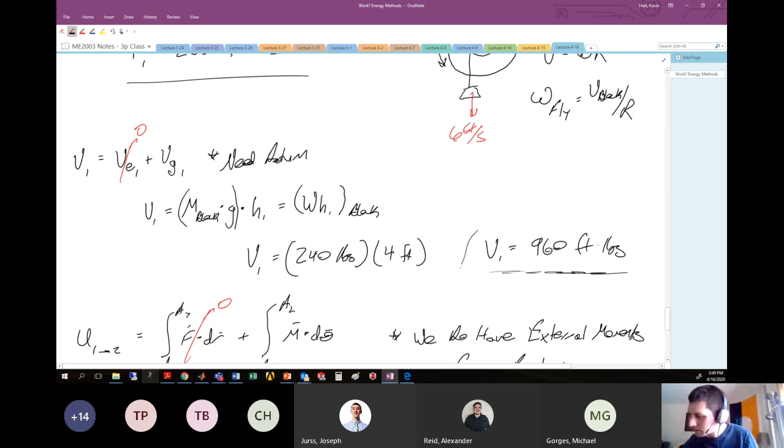So we've got U1 to 2, we've got our V1, and we've got our T1. Done with the left-hand side. Now let's go to the right-hand side, conservation of energy.

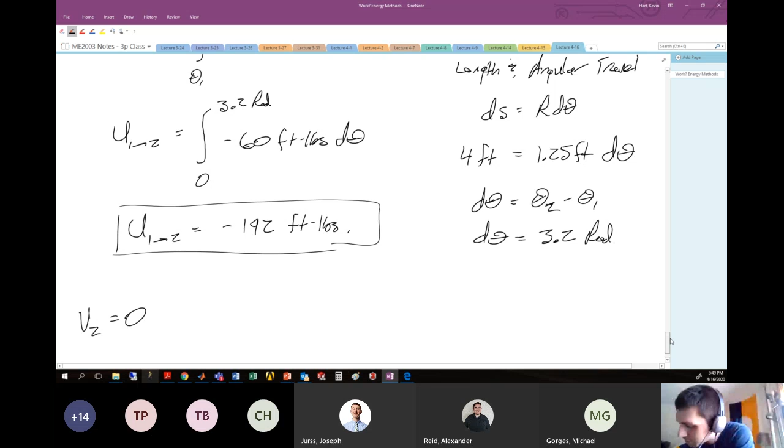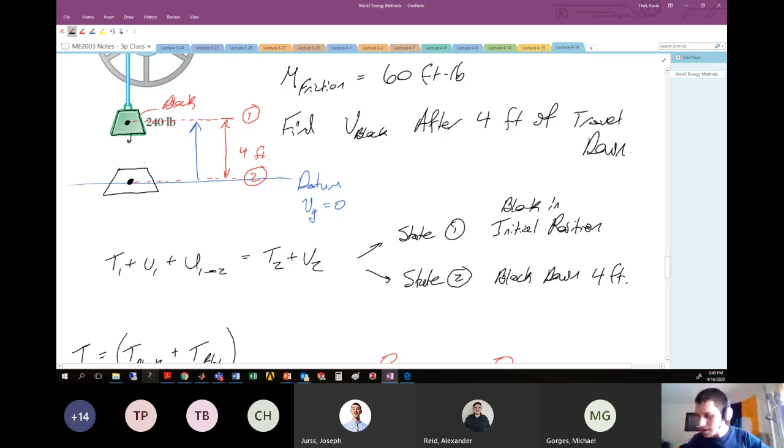V2 is 0 - I'm at the datum for my particular body, and I don't have any springs. So in position number 2, since the object is at the datum, the height of that object above the datum is 0, and so the potential energy associated with that object is just equal to 0.

Last thing we have to do is our kinetic energy in position number 2, which looks very similar to the kinetic energy in position number 1, except we have an unknown here, which is what we're solving for - the velocity of the block in position number 2. So here we'll have 1/2 mass of the block, velocity at the center of gravity of the block in position number 2, squared.

Plus 1/2 IG, the mass moment of inertia of the flywheel, multiplied by the angular velocity of the flywheel squared. We know there's a relationship between linear velocity of the block and angular velocity of the flywheel, which is Vg of the block over the radius of the drum, r, all squared.

All this information we have - the only thing we don't know is Vg. So we can retain Vg and understand that after plugging in all the numbers, this will be something like 7.09 Vg of the block in position number 2, squared.

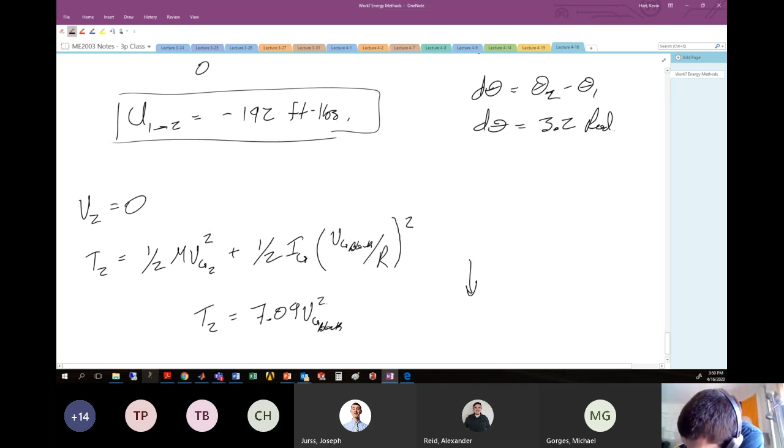And now we have everything. Sorry, I'm keeping an extra minute. Our equation here.

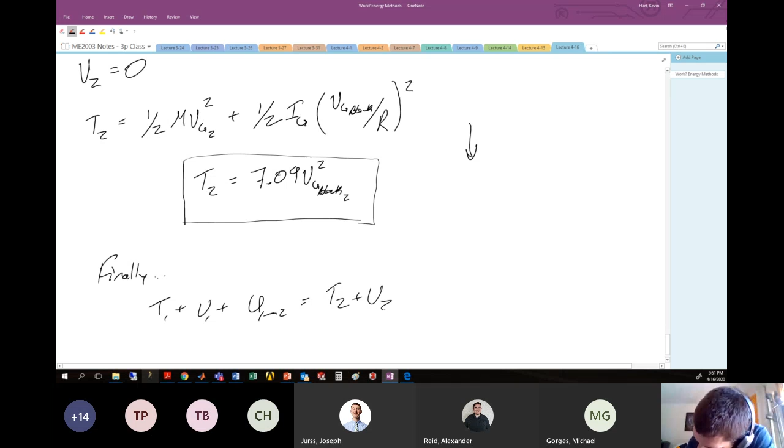Our T1 was 255, V1 was 960. The work from 1 to 2, negative 192, trying to slow this thing down, equals T2, which was 7.09 times velocity of the block in position number 2 squared, plus the potential energy in condition number 2, which is 0. Units here are foot-pounds, so velocity will be in feet per second. You can solve for the velocity of the block in position number 2: 12 feet per second.